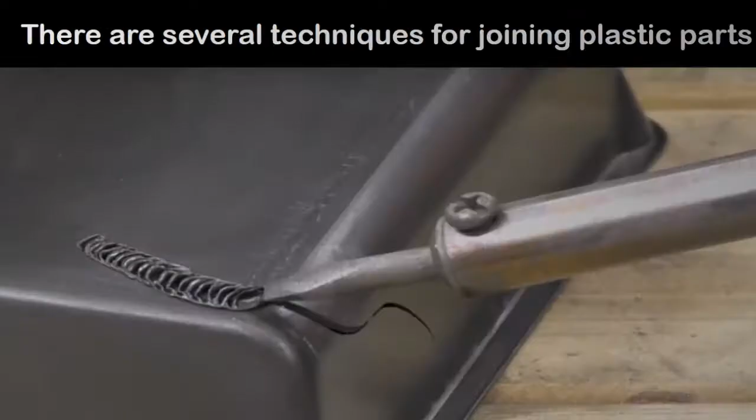Let's see the process of joining plastics. There are several techniques for joining plastics. Equipment cost and labor for each method vary considerably. Most techniques have limits on the size and types of plastic that can be joined.

Types of joining plastics: first is mechanical fastening, second fusion bonding, third hot gas welding, fourth vibration welding, solvent bonding, ultrasonic welding, induction welding, and dielectric welding.

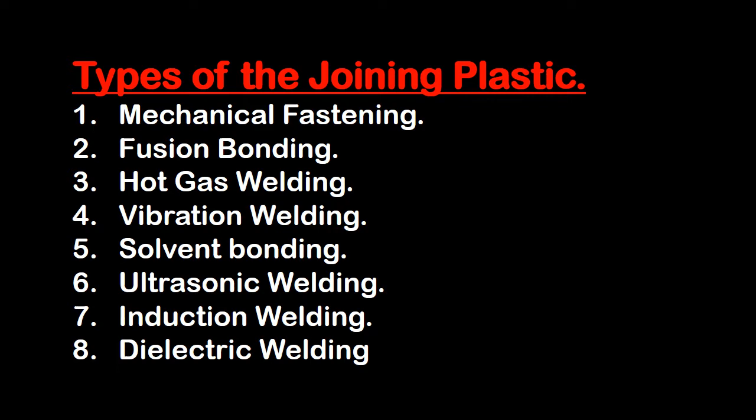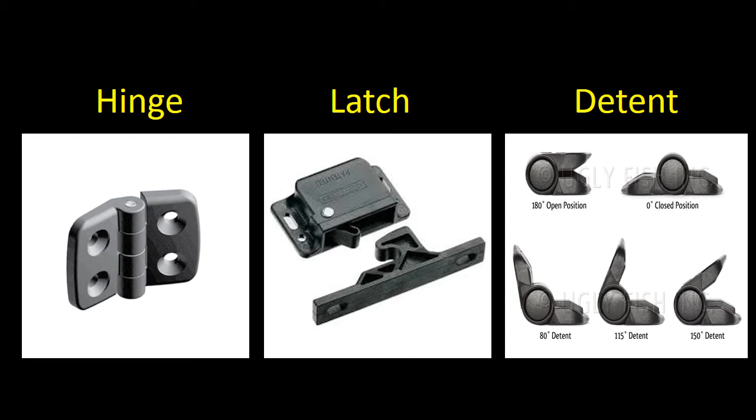Let's discuss mechanical fastening. The simplest way to join plastic parts is to design a fastening element like a hinge, latch, or detent into the part. Only stronger plastics are suitable for this method. The joint must survive the strain of assembly, service load, and possible repeated use.

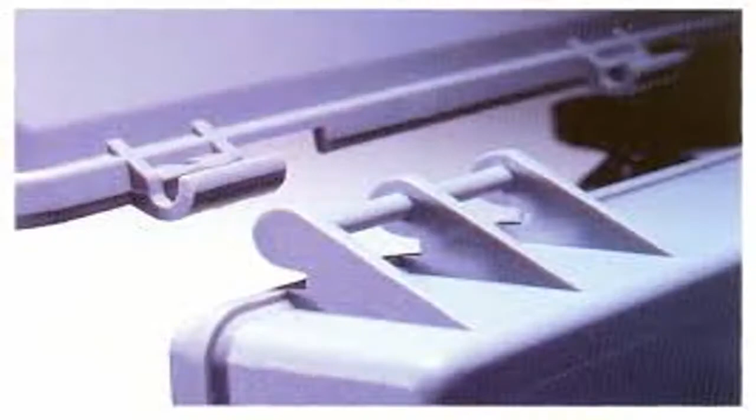This form of fastening is suitable only for lightly loaded, non-rigid assemblies where precision is not critical. Mechanical fasteners such as screws, rivets, pins, and sheet metal nuts are the most common joining methods. They require a plastic that can withstand the strain of fastener insertion and the subsequent high stress around the fastener.

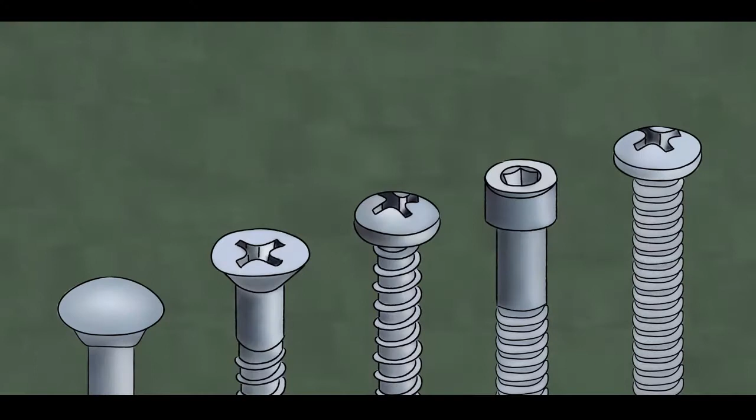Conventional machine screws are rarely used except with extremely strong plastic. There are a number of fasteners designed for use with plastic. Threaded fasteners work best on thick sections. Thread-forming screws are preferred for soft material, while thread-cutting screws work best on hard plastic.

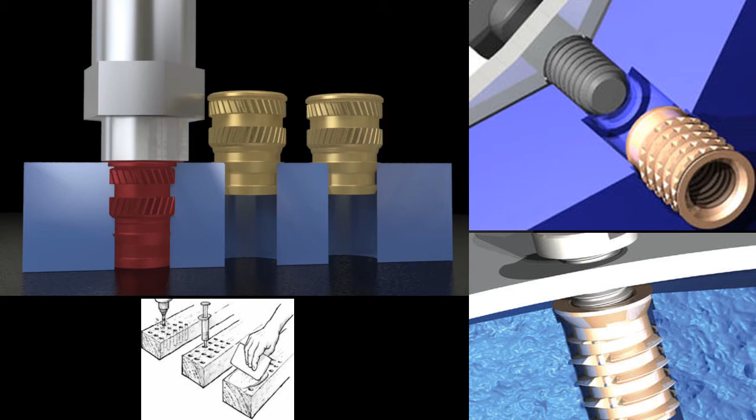Push-on lock nuts and clips may be better for thinner sections. If a fastener has to be removed a number of times, metal inserts are recommended. They may be molded in place, forced, glued, or expanded into the hole, or inserted ultrasonically.

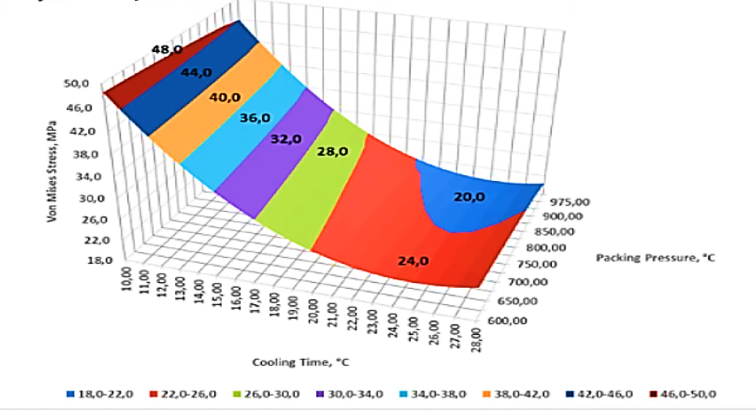There are two main categories of industrial fastener: permanent and non-permanent. Screws are an example of a non-permanent fastener since they can be removed, replaced, and reused.

Failure is normally a result of cracking or crazing due to tensile stress that can be induced under high pressure. Compressive stress is much more desirable due to the lower susceptibility to localized stress cracking.

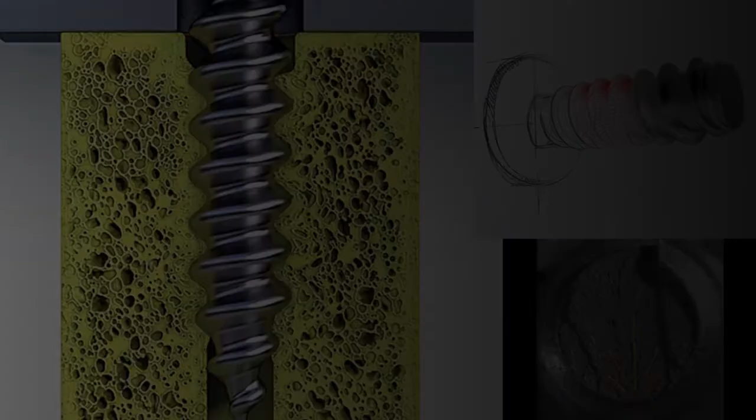Use screws in mechanical fastening as per head design: washer type, hex and square, fillister, truss, and pan head. As per the first image, to fasten the part with a screw you need to provide a boss between two surfaces, and also use a standoff according to the application.